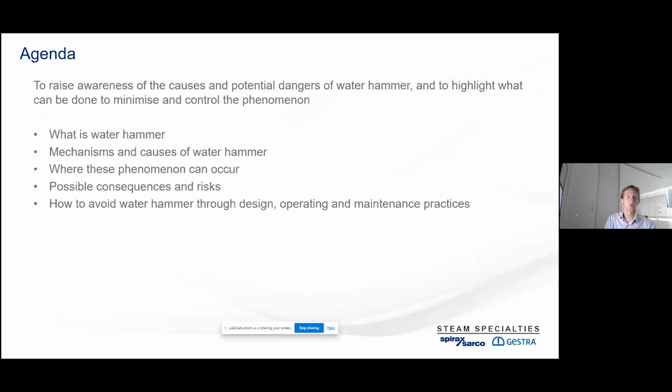So at Spirax Sarco, we always like to start off all of our meetings with a safety moment to keep safety central to everything we do. So this safety moment I have is obviously waterhammer related. About 20 years ago now, there was a period of 2 weeks at Grangemouth Refinery and Petrochemical Complex, which is in Scotland, and there were 3 different events that occurred.

First of all, there was a power distribution failure. About a week later, there was an MP steam main rupture. And the last event, just shortly after that, was a fluidized catalytic cracker unit fire. Each of these events had the potential to cause fatal injury to personnel, but also quite serious environmental impacts. Although in these cases, no serious injury did occur, and there was only a short-term impact on the environment.

But focusing on the MP steam main rupture case, it was an 18-bar medium pressure steam main. It was located very near the south site boundary, and there's a public road on this site that runs through the middle of the plant, and that was where it ruptured. It resulted in a significant loss of MP steam directly to atmosphere. But more importantly, it damaged fencing and equipment adjacent to the road.

Debris and steam was blown across the road for a period of about an hour until the leak was isolated. The leak also had quite a loud noise. It sounded like a jet engine taking off, which caused disruption to the local area and breached environmental regulations from a noise perspective. There was also a member of the public walking their dog about 300 meters away when the incident occurred, and they sustained injuries from falling over in the shock of the situation.

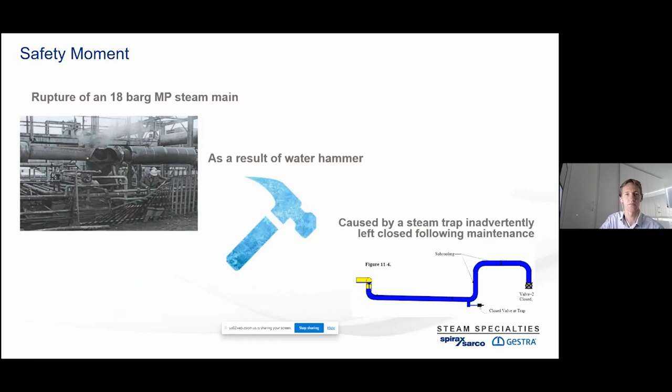So to start with then, what is waterhammer? The important thing to note is that waterhammer is a symptom. It's not the problem itself. The term waterhammer is used to refer to notable effects which are actually caused by a few quite different phenomena. And waterhammer is so called because it's usually observed with the banging sounds of pipes bouncing around in their supports or hitting onto other surrounding equipment.

Waterhammer is not limited to industrial settings. It can commonly be seen at home in domestic settings, caused by something as simple as quickly closing a tap. You can see at home quite visually that pipes or hoses in the garden can move. This is due to the pressure waves in the water. And they might strike floor joists or walls and create that banging noise. But due to the short pipework lengths and hoses involved and the small flow rates in houses, waterhammer in the home is rarely more than an irritation. Industrially, however, waterhammer can be much more than a minor irritation.

In general, waterhammer effects occur when the velocity of fluid suddenly changes, or the flow becomes unsteady or transient. And this can be across the system as a whole, or at very localized points. But because it occurs due to changes in flow, the mechanisms that cause waterhammer are always present to some degree in the systems, because changes in pressure and fluid properties are required for maintaining and controlling process conditions. And therefore, any fluid flow, any process control actions create pressure changes. That's what they do. That's how they control things.

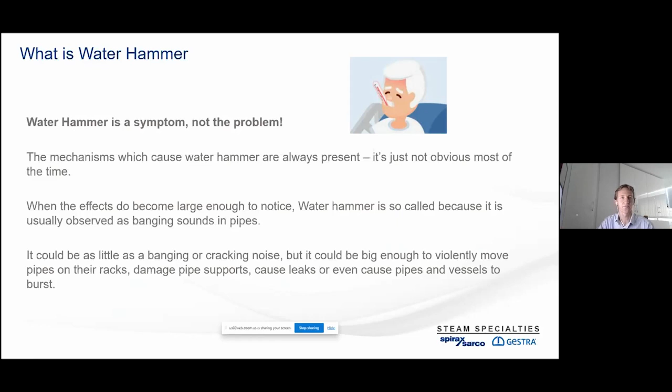So as I said, Waterhammer being the symptom, not the problem itself, the important thing is to identify the correct mechanism that's involved in particular circumstances in order to then understand how severe the incident may be, or the potential may be, and therefore how to avoid it through good design operating practices. But without identifying the correct mechanism, the solutions that are applied might not be correct.

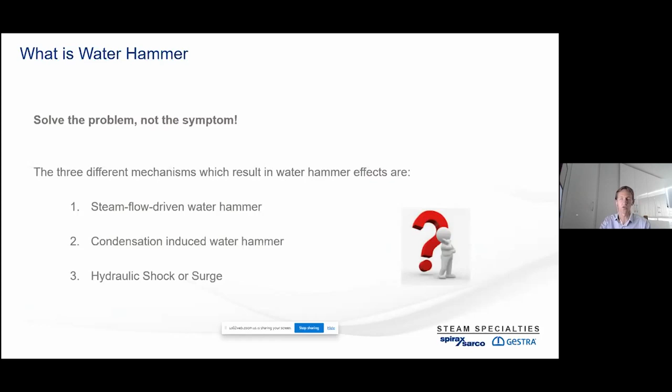So the three different mechanisms that I talked through are steam flow driven Waterhammer, condensation induced Waterhammer, and hydraulic shock or surge, as it's sometimes known. So the first one then, steam flow driven Waterhammer. There are a couple of ways in which this can occur.

So the first one is accumulation of condensate in steam piping, which results in the formation of waves or slugs that form by the action of the steam flowing over the top of the condensate. And this picks up the surface of the liquid into waves, and then they can build into slugs. And that's much the same way that ocean waves are created with the wind blowing over the surface of the sea.

The second way it can form is that liquid pockets can collect at low points that aren't properly drained, or form with pipework sags over time, supports don't keep it nice and level. And then that slug, once it builds up to a certain volume, can get pushed out ahead of the steam to form a slug of liquid that carries off down the pipework.

And the issue occurs when these slugs or waves are pushed along the pipe by the following steam, and then when they get to a restriction or a bend in the piping, the momentum of that liquid slug is transferred into the equipment, applying a large force at that location. And the worst case for this is that liquid slug completely fills the whole cross section of the pipe, and it's therefore driven along at the full steam velocity, which could be up to 40 meters per second, so very fast. And the effects are likely to be greater where there are high steam velocities, but also where you've got longer straight lengths of pipe, which allow formation and acceleration of larger liquid slugs.

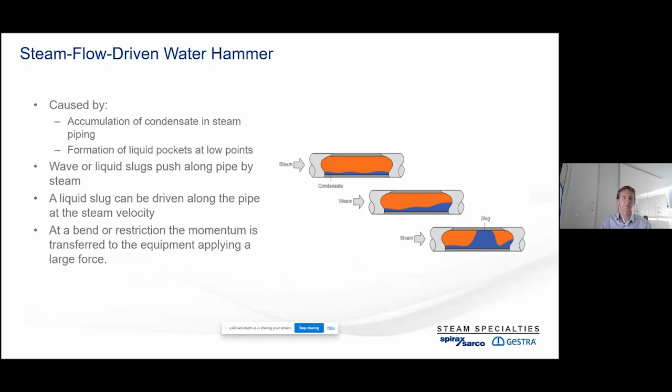So the vapor condenses, as I said, then the volume it takes up dramatically reduces because the density of liquid is much greater than the density of the vapor.

So the bubble collapses, the pocket collapses, and you get a sudden rush of liquid to fill that void. And that sudden inrush of liquid to fill the void, be it a big section of piping or just a small steam bubble, is called an implosion. And the forces that generates are very high, as the liquid faces hit each other. So it creates very high pressure pulses in the system, and those pressure pulses then spread out, radiate out, and impact on equipment and can impart very high forces on the equipment.

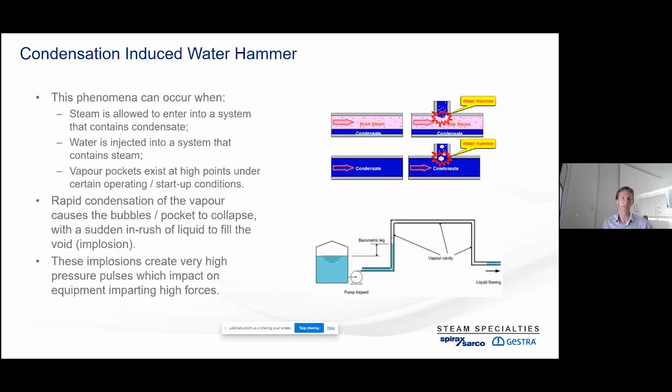This kind of water hammer can occur very suddenly from seemingly nowhere. You could hear a sharp cracking sound if it's small amounts of steam being injected into a full condensate line. On the other hand, it could be a big vapor pocket that just sits there quite happily, not changing for a long period, and a sudden change in temperature or pressure causes very sudden collapse of that pocket, and then the effects are felt very suddenly.

So before we move on to the third mechanism for water hammer, I'll point out that the steam flow induced water hammer and the condensation induced water hammer can combine to create water hammer together. So it can start off in the same way that steam flow driven water hammer does, where you get the flow of steam over the top of the condensate layer in the pipe, and this causes waves to pick up on the surface that could form into slugs. And when they form into slugs that completely fill the cross-section of the pipework, you end up getting pockets of vapor trapped between the peaks of the waves and the slugs in the pipework.

And then as these get compressed as the wave moves down the line, or you get further loss of heat from the pipe wall, again, these vapor pockets can collapse. And then you get the condensation-induced water hammer kicking in, where you get the implosion of that vapor bubble, the inrush of liquid to fill that void, and then the high pressure pulses and force on equipment that result from that. So this can happen in steam lines as well, but obviously you do need a certain amount of liquid to be able to fill the cross-section of the pipework to create these pockets.

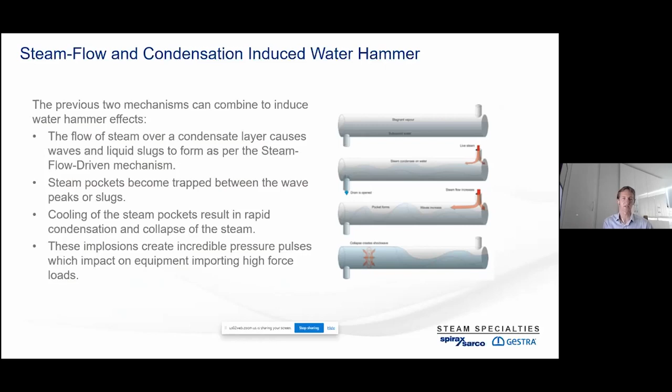The third mechanism for water hammer then is hydraulic shock or surge, as it's commonly referred to. And this is a very different mechanism to the previous two. It's not caused by slugs traveling in a two-phase line. It's not caused by condensation of vapor in a two-phase line. It's caused by sudden changes in the bulk fluid velocity of liquid full systems. So it's a very different mechanism, as I said.

And its cause is because liquids, although we tend to treat them from a design perspective as incompressible, actually are very slightly compressible. And as a result of a sudden restriction to flow, so closing a valve or a pump suddenly stopping, the whole column of liquid does not just suddenly stop instantly. What happens is the kinetic energy in that flowing column of liquid is transferred into the fluid by compression of that liquid. And this results in pressure shock waves being generated. And these pressure shock waves can travel at speeds usually close to the speed of sound along the pipework, conveying that change of pressure.

And the greater the rate of change of liquid velocity, and the greater the mass of liquid that's being accelerated, so the length of the pipeline, the length of the column of liquid, the higher the resultant peak pressures. And this particularly steps up in terms of the peak pressures generated when the piping length exceeds the pressure wave length. You then get a compound length, because these pressure shock waves can bounce backwards and forwards from obstacles and restrictions in the pipework.

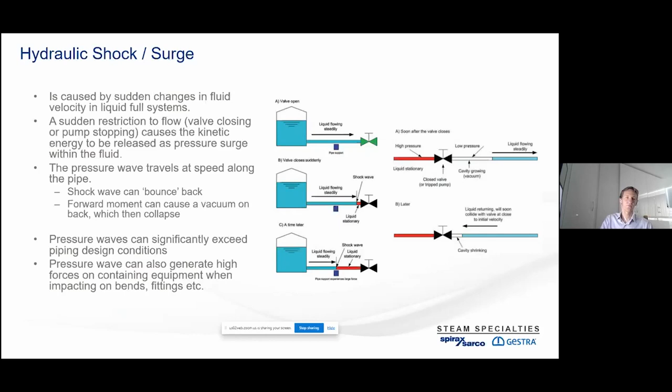Having explained the different mechanisms causing water hammer phenomena, it should be apparent, I think, that water hammer effects can occur almost anywhere around a plant. It's not just confined to steam and condensate systems. But as the effects are more likely to be noticeable in systems which have higher fluid velocities, have greater inventories, and have greater potential for mixing of both steam and condensate, the following systems are typically the most common systems in which water hammer is experienced. You can see it is generally commonly around the steam and condensate systems.

So steam flow-driven water hammer, obviously very much on steam distribution pipework, but also on two-phase condensate return lines. And I've noted here as well that you can see it on single-phase condensate return lines, where it should operate at saturation pressure, and therefore if you have high pressure drop in the line, flow meters, restriction valves, that kind of thing, you'll get flashing through that system, and it turns into a two-phase condensate stream, and you can therefore get hammer in that line. The condensation-induced water hammer can occur anywhere you can get steam flow-driven water hammer.

But in addition to the steam and condensate return lines, it's common to see it close to steam consumers, where you've got steam coming in and a potential for steam breakthrough. If the steam usage control and the condensate return control, the control valves or steam traps, are not maintained properly, you get breakthrough into the condensate system. So it's quite common to see induced water hammer occurring there. And particularly around these areas during startup and shutdown, when systems are not up to temperature. You've got a lot more condensate around the system than you'd normally expect. You haven't got the normal flow rates.

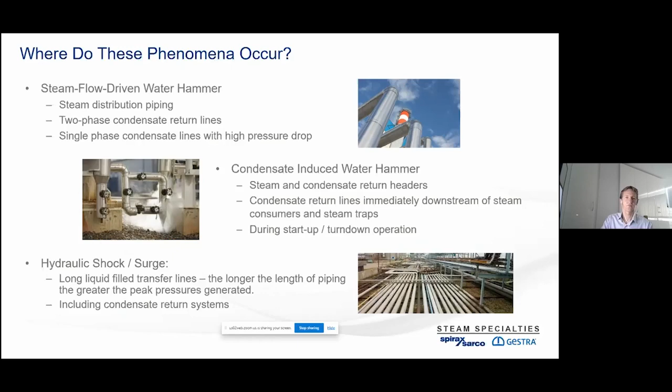So before looking at the mitigation measures, just to highlight what the potential consequences and risks of water hammer are, and I covered some of this already in the safety moment. We've seen that it clearly can have quite significant adverse safety, environmental, and commercial consequences. And there's real potential for equipment damage, resulting in loss of containment, personnel injuries or fatalities, and environmental damage that comes with the loss of containment. But obviously, it's not just limited to that.

If equipment is damaged, or even if pipework is knocked around, it can have quite significant consequential production losses, as pipework has to be isolated, equipment has to be tested and checked to make sure it's safe for continued use, and all of this on the steam system can disrupt the steam supply to process units. And without that, production has to be scaled back or even stopped, which obviously is an expensive and time-consuming business.

And perhaps more importantly, perhaps in the long term, is potential for reputational damage. As I mentioned in the safety moment, the water hammer and the rupture of the MP steam main at the Grangemouth complex caused debris and steam to be sprayed across a public road. There was injury to a member of the public on the road, and also the noise was heard for hundreds of meters all around, very high levels. And all that can add over time to that loss of reputation.

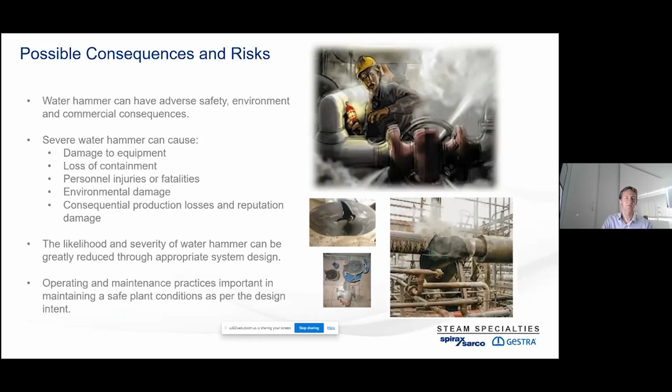The next few slides are going to run through some ideas, some thoughts, some general good practices for avoiding and mitigating water hammer. There's lots more. There's lots that can be done. I'm going to run through the main points, but there's a lot of detail behind this. I'm just going to summarize it really. Otherwise, we'll be here forever talking through the minor points.

But steam flow driven water hammer, as I mentioned, that's mainly on steam distribution pipework. So the key here is all about trying to avoid the accumulation of condensate within the system, either over the whole system or also in local pockets as well. Remembering that you can get water hammer by slugs being picked up out of low point pockets and pushed on. So everything here is about avoiding condensate accumulation.

So it's about having slopes in the direction of flow, so condensate will drain down to a carefully managed selected low point. That low point has got the correct capacity, the correct facilities for capturing that condensate that drains down to it and then removing it. So that steam trap capacity, the spacing of steam traps, but making sure, of course, that the capacity is not just good for normal operating, it's also good for startup and shutdown scenarios as well.

It's also really important to have the correct type of trap for the service conditions. So whether the steam's superheated or saturated, you may need to have different types of trap to operate properly, and the wrong one may not work as wanted, or it may fail too frequently. So it's really key to get the right type of trap for the right conditions.

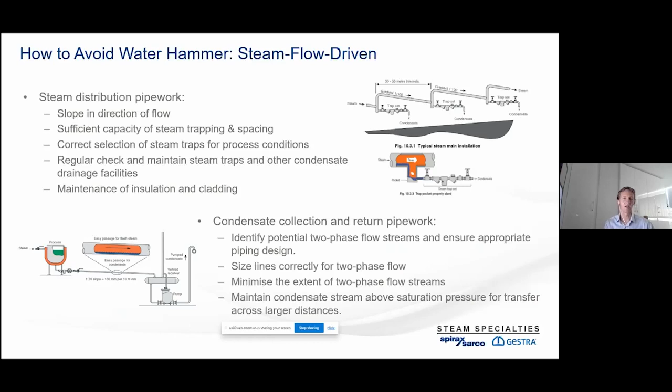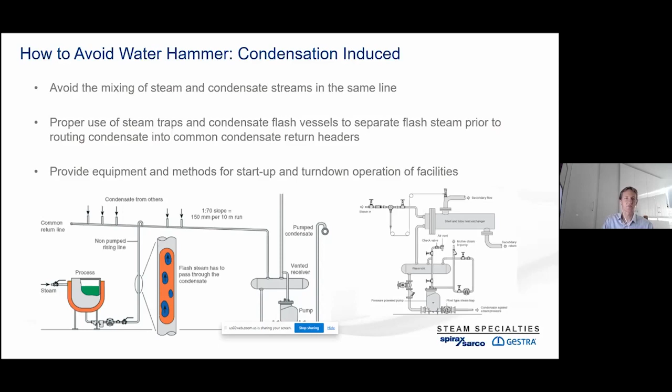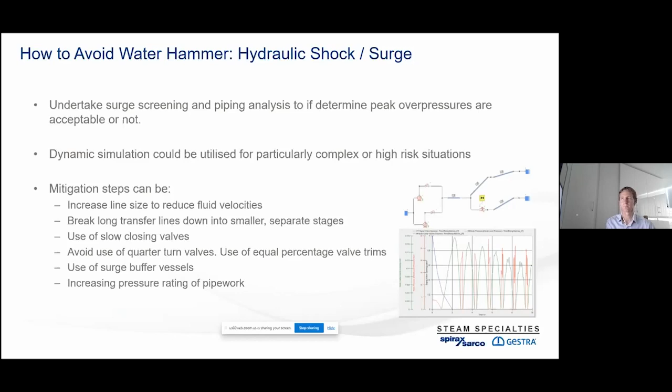Okay, so that was my last slide. Thanks very much for your attention. I know it's a fairly quick run through of a topic which many papers have been written on, many academic studies, and lots of site experience and documents as well.